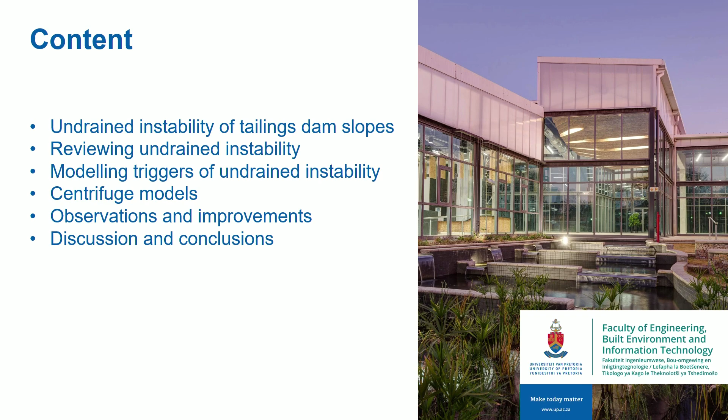Thank you very much for the introduction, Suzanne and Jan, and thank you very much to the organizers for the invitation. I slightly modified the title of my presentation to modeling of the triggers of undrained instability in tailings dams. What I'm going to present is aspects related to undrained instability of tailing slopes.

I will review undrained instability, specifically looking at modeling triggers of undrained instability. Then I'll describe the centrifuge models with some observations and discussion conclusions.

What I'm showing here is a Google Earth image of the Johannesburg area. There's a very small red dot on the locality map at the bottom showing the location. All the white marks you see in the figure represent tailings dams. Over this area of approximately 70 kilometers, we've got a vast number of tailings dams.

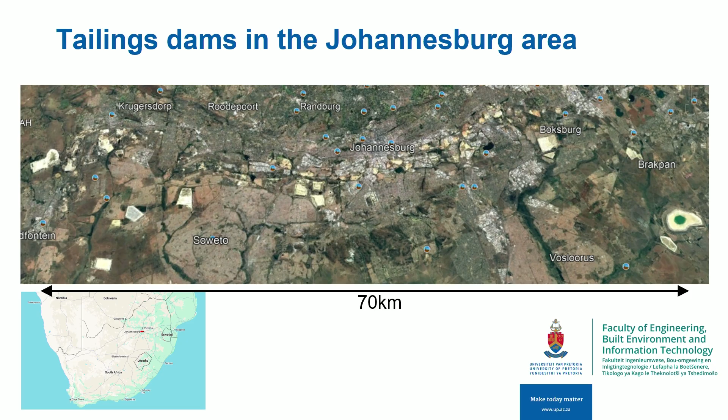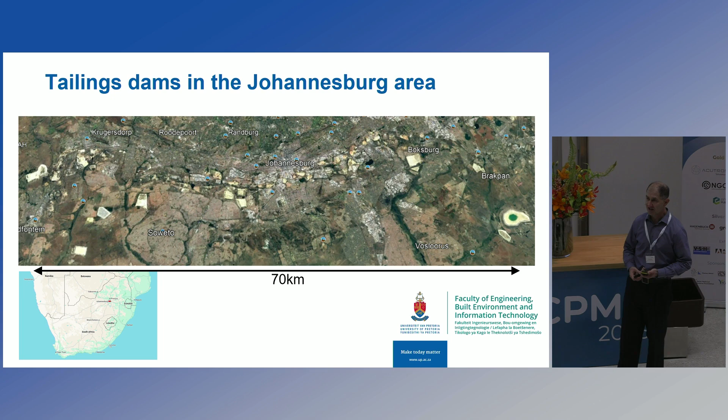Many of these tailings dams are very close to built-up areas, and they have been around for many years. They started mining in 1886. So we've got a large number of tailings dams very close to a lot of built-up areas, and all these tailings dams currently stand—they are at the moment behaving.

What I want to do is zoom in. This is a photo I took from the plane coming back from the previous physical modeling conference in Korea. Coming into land at Johannesburg Airport, you often see this very large tailings dam. It measures 4.1 kilometers in length, is 130 meters high at the moment, and is an upstream raised tailings dam.

What is important to note here is that we have a pool on the dam that is relatively small. It is well contained in the middle of the dam, and we have relatively flat slopes. I must also mention we have a relatively dry climate in South Africa.

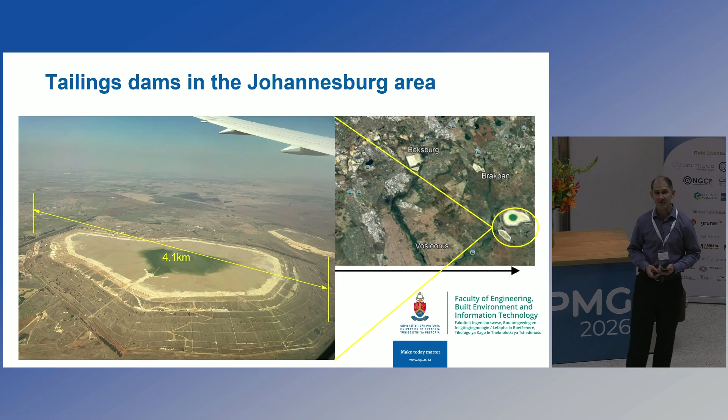Nearly all the dams that I showed you in the previous picture are upstream raised, and obviously to change things on those dams to stabilize them is prohibitively costly. So we have to make these things work.

A typical upstream tailings dam looks like that. We've got the starter wall, then people start to construct a drain—these days they will always construct a drain. Usually there's a layer, a liner system underneath today.

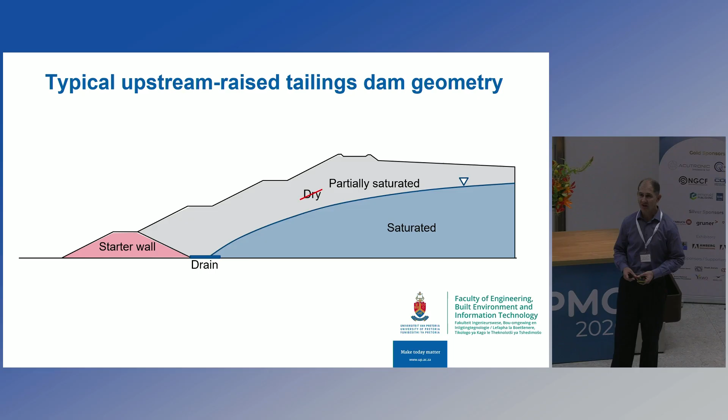They then start filling up the dam, allowing it to dry properly. Then you use the dried material to raise the embankment, and there will be a pond far to the right. You will have a zone that is saturated below that—people thought initially dry above that, but it's partially saturated, so you still have unsaturated soil mechanics to consider there.

So these dams are then raised by building them higher with the material that they are made from, which is a slurry when it arrives. And obviously, you need to do this very responsibly to not have big instability issues.

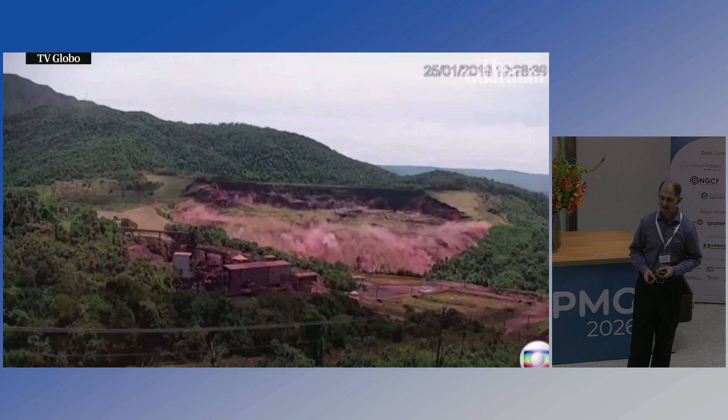I'm sure all of you would have seen this very disconcerting video of what happens if things go wrong. This happened in 2019 in Brazil, so we are reminded of the consequences of getting it wrong. If we do not manage these processes, you can get this very disastrous accident happening, and it cost the life of 270 people. So we need to deal with this very cautiously and carefully.

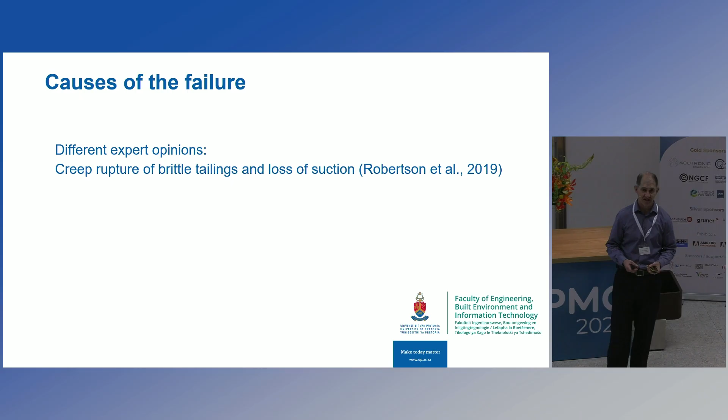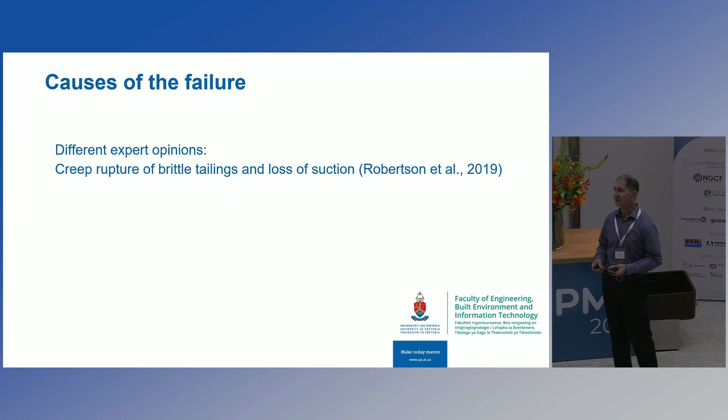The causes of the failure that I've shown you are ascribed to different reasons by different people. One group proposed creep rupture of brittle tailings, with creep eventually breaking the bonds in the weakly cemented soils, combined with a reduction in suction over time due to rainfall aspects, resulting in this failure.

What you probably did not see on the photo is they were busy installing piezometers using drilling involving water in the process down to 60 meters. If that column was full of water, that would exert a pressure of 600 kPa in the layers at the bottom where that piezometer was being installed. So 600 kPa in a dam with concerning stability may be a very real trigger, and the group in Barcelona is proposing this as a possible cause of the failure.

The bottom line is that we observed a very dramatic liquefaction type failure, and that is why we are questioning undrained instability. We need to understand undrained instability.

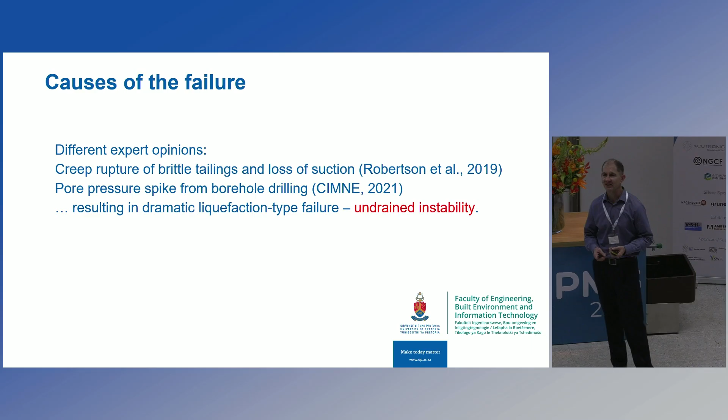Traditionally, tailings dams have been designed using drained analysis. This has a very large impact on the mining industry because we are now concerned about undrained instability of tailings dams. Tailings dam stability analysis, when analyzed undrained, shows that numerous dams are potentially unstable. The cost of remediating these structures is absolutely extreme. The most expensive buttress built in South Africa that I am aware of cost $80 million. $80 million cannot be afforded by every mining house. So the implications are really severe.

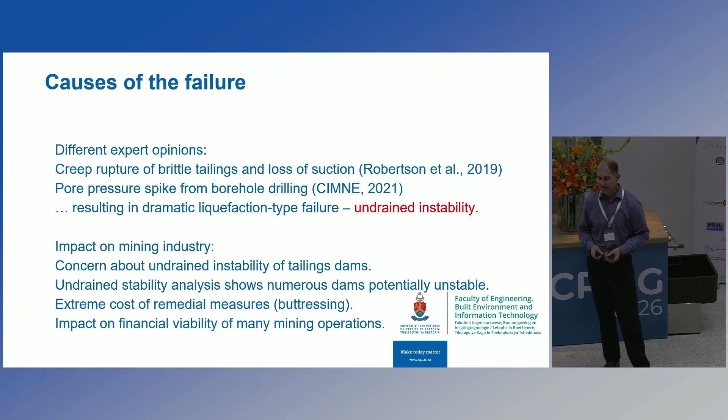So the financial feasibility or viability of our mining houses are in question, and they employ very many people who will have no other income, basically. So we have to balance this impact: do we close down the mines because of the financial constraints, or what are we going to do? We can't risk the risk to life that we have seen could be real.

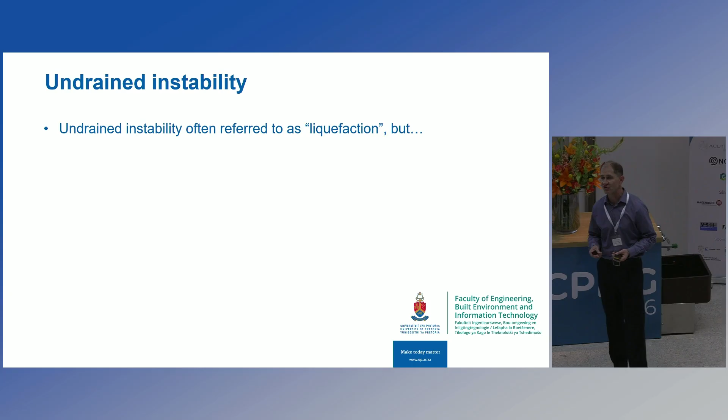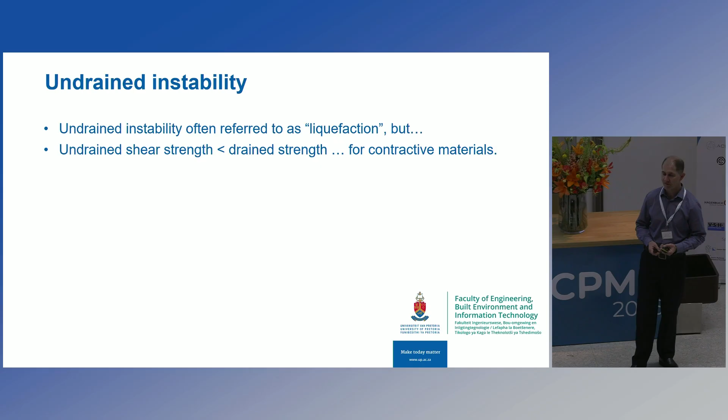So we are really interested in understanding liquefaction, trying to model that in the centrifuge. But one thing we must realize is you do not need liquefaction for a slope to become unstable under undrained conditions. We just need a reduction in the mobilizable strength, which could really happen. Typically, undrained strength is less than drained strength for the contractive materials we are often dealing with. And for you to see liquefaction, we need a contractive and a strain softening material. Importantly, undrained behavior requires some sort of a trigger.

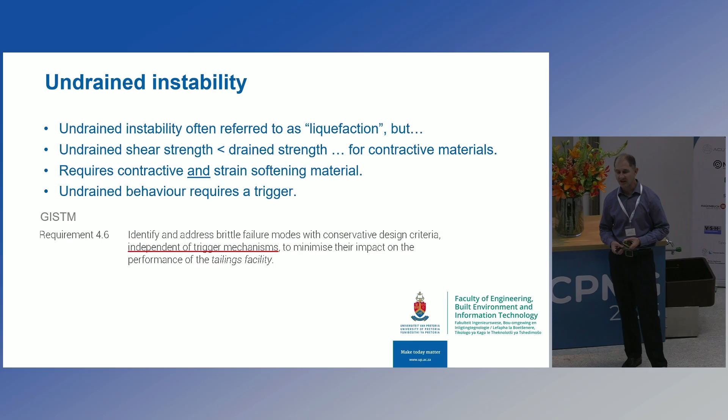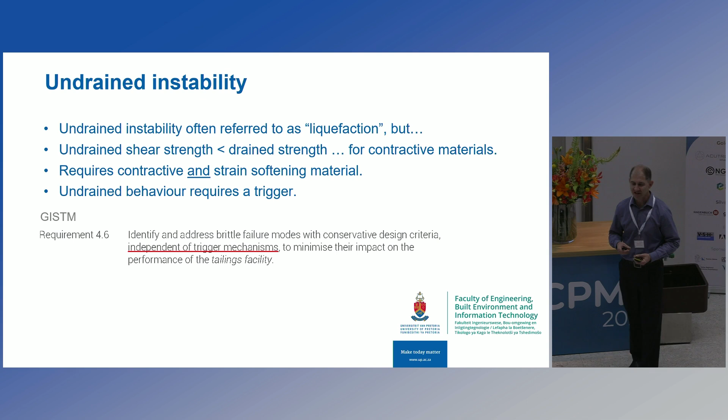Now, after the disaster that I showed you, the Global Industry Standard on Tailings Management was published, and they advocate for the identification and addressing of brittle failure modes with conservative design criteria independent of the trigger mechanism. So they don't really care about what the trigger mechanism is. They say you will design for undrained conditions. We as academics find that somewhat unsatisfactory because we want to understand the mechanisms that can result in this undrained stability or instability.

So I want to spend a little bit of time talking about undrained instability, factors controlling that. I'm showing a drained stress path, the black line, and an undrained triaxial stress path. The undrained triaxial stress path turns to the left and reaches a peak, so it's a slightly strain softening material. If you do many of these tests, you can map those peaks and fit a line through it.

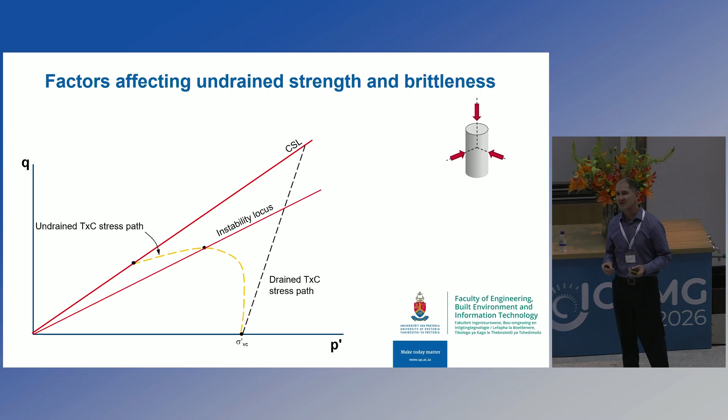The reason why we are able to follow the stress path to the peak and beyond is because we are doing a displacement control test. Life is not displacement control, it is load control in a real tailings dam. So when you get to the undrained instability locus, you will see potentially brittle failure taking place, because strength is going to reduce with further strain being imposed.

So there's this undrained, unstable zone. And a big question now is how close is our stress state in the dam to that unstable zone? So now we need to think about the ratio between horizontal and vertical stress.

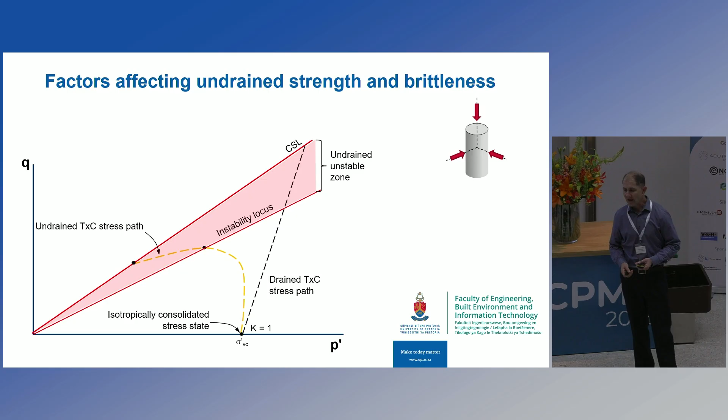If we have isotropic conditions, then the stress state is far from the instability zone. It is basically on the floor where I'm showing it at the moment. And if you look at the shear stress strain relationship, the stress state is represented by the K equal to 1 value. So there's a lot of scope to handle shear strain, and to get you to the peak, you need to travel quite far.

So if K naught is not equal to 1, if it is lesser than 1, which we believe it typically to be, because you are mobilizing shear stress in the walls of your tailings dams, then it brings you a lot closer to the apex of that stress strain curve. So the material is going to behave much more brittle than in the case if you have a K naught equal to sort of hydrostatic conditions. So K naught is an important factor - the ratio between horizontal and vertical stress.

So another aspect that is important is what is the shape or the direction of the stress path that we are imposing. I'm showing a triaxial extension stress path, which is bringing us to the instability locus much more directly than what a drained triaxial stress or a compression stress path would have done.

There are other very important stress paths that we need to consider, like the constant shear drained stress path, which is going to be traveling from the right to the left in the diagram as water table rises, for example. A rising water table will cause the stress state to travel from right to left across the screen. And that is a real, an actual possibility in tailing slopes.

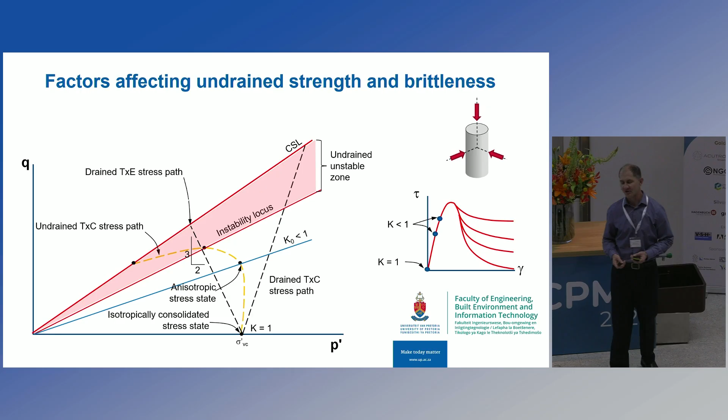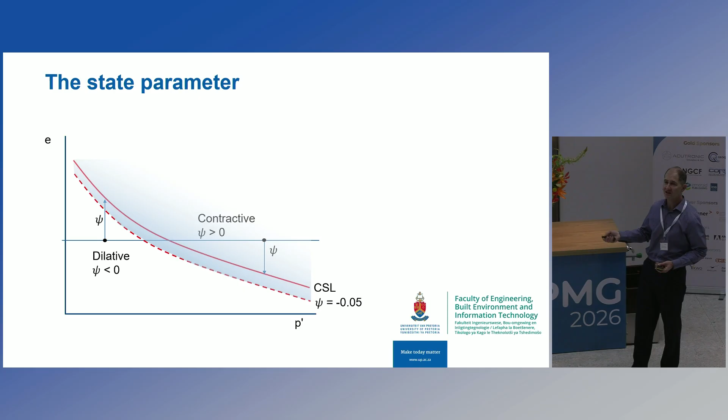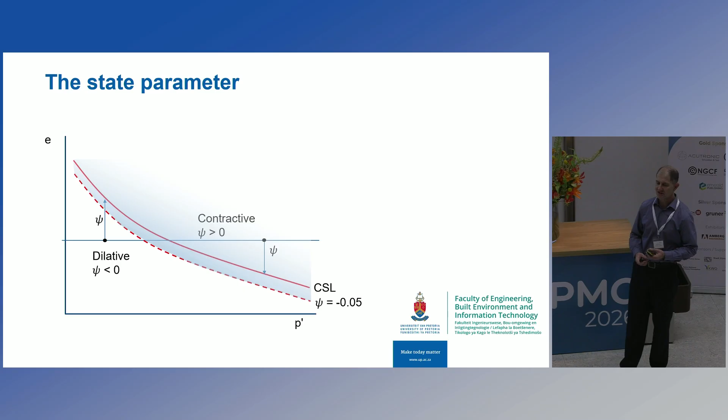So if you have a contractive material in your tailing slope, you will be concerned, and you will be glad if you have a dilative slope. So the division between contractive and dilative is not really taken at the critical state line, but from experience, I think it's Been and Jefferies 2016 proposed using minus 0.05 as the cutoff.

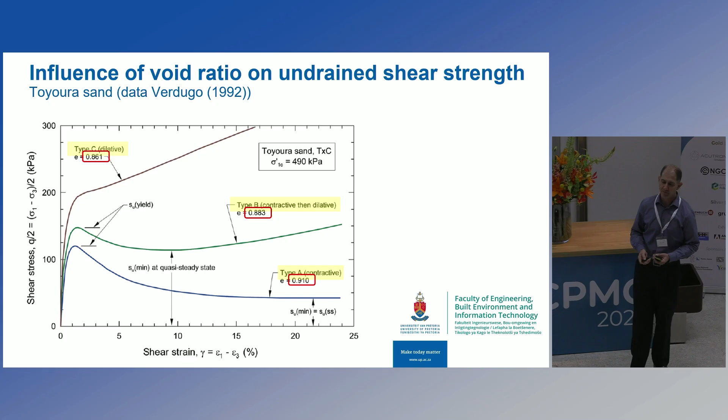So more conservative. What else influences undrained shear strength? So this is well-known data by Verdugo. What I want to point out is we have the same material, Toyoura sand, and we are looking at a void ratio of 0.86. If you change that void ratio to 0.88, you completely change the stress strain properties. Taking it 0.03 higher than that, you changed it completely.

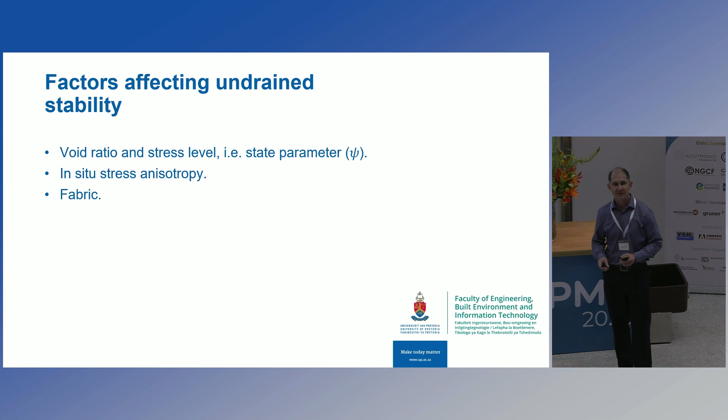So if you want to do an analysis of a tailings dam stability and you have much variation in shear strength, in void ratio, it is difficult for you to analyze the undrained shear strength. So factors affecting the undrained shear strength include the state parameter, which is capturing the void ratio and the stress level. It is important to understand stress anisotropy, that comes into the problem. The fabric is important because it controls that instability locus that I've shown, which is not a material property. It depends on how the material is placed and other factors. So it also depends on the imposed stress path.

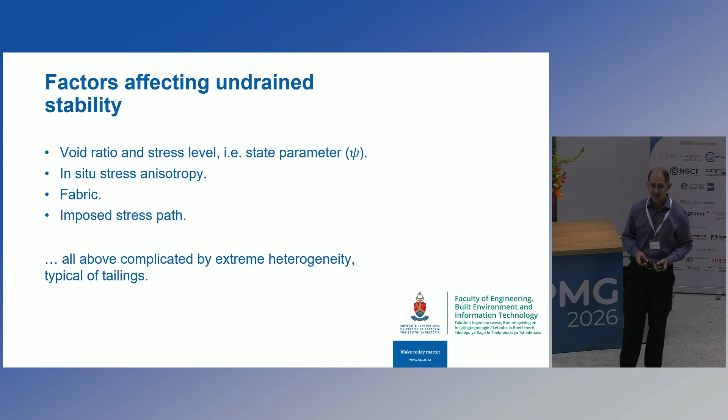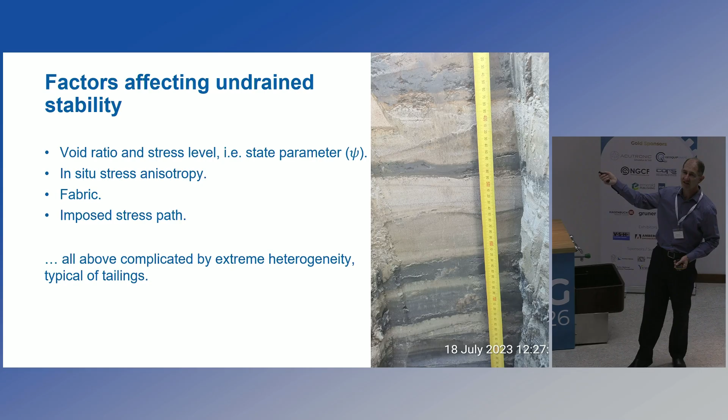So there's a complicated problem to analyze, and then the material that you're handling looks like that. So extreme heterogeneity, we have, you can see the scale there, that's 100 millimeters. You have several layers in there. So we have a problem on hand.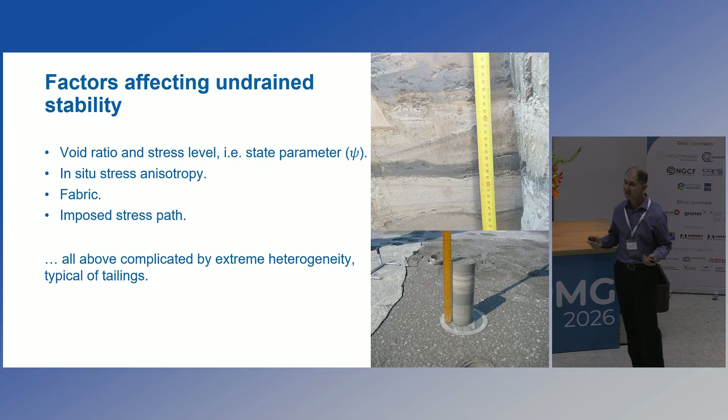So we're sitting with a very difficult problem. We find some guidance in the literature about what could constitute mechanisms of instability, so proposed triggers of undrained instability: overtopping, overloading, loss of support. What I want to say at this stage is we excluded earthquakes, seismic or dynamic triggers from the work we've done. We don't have an earthquake shaker, and South Africa is a low earthquake zone, not meaning we don't get any seismic action, but we did not include that in our study.

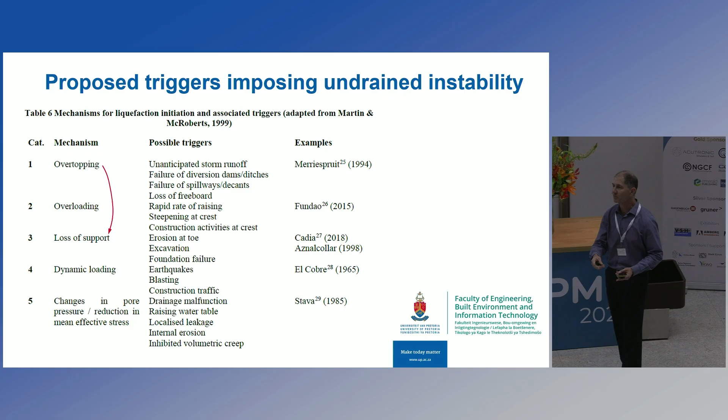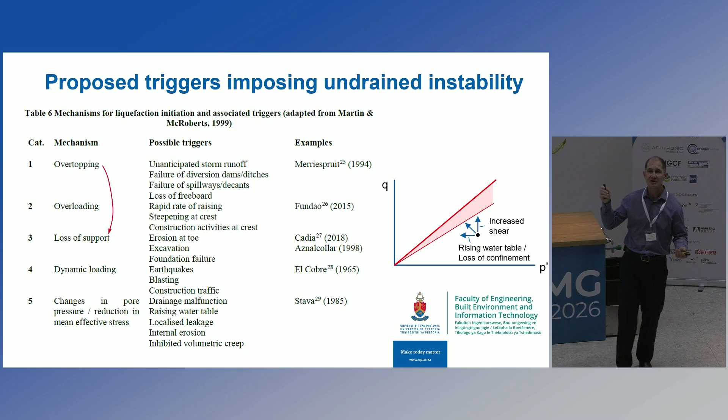The overtopping and loss of support triggers are two faces of the same coin, because overtopping typically results in removal of material from the toe of a slope due to erosion, and you end up with a loss of support. All the stress paths associated with different trigger mechanisms look like what I'm showing: the constant shear drained stress path points there, and if you increase shear stress, maybe due to placing load somewhere, it looks like that. But all of them drive us closer to the instability zone.

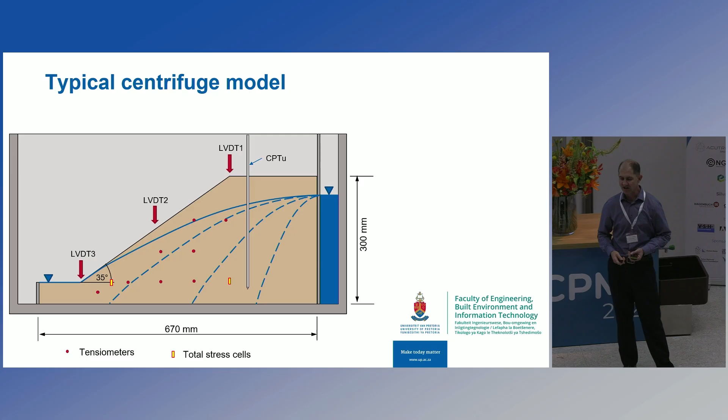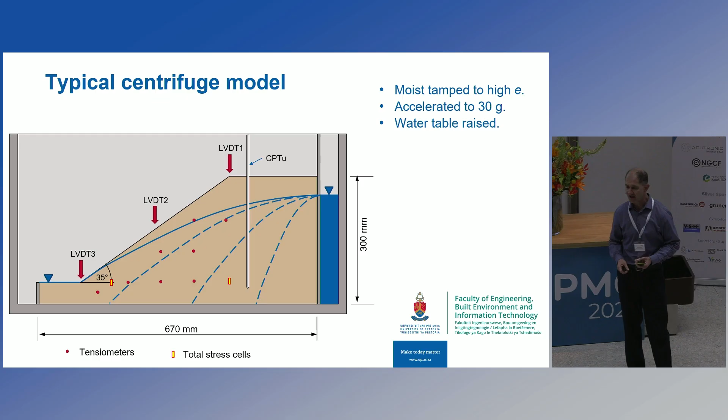There are a few model studies in the literature studying tailings dams, but many on slopes. We read up on some of these and started building slopes in the centrifuge that looked a bit like that. We moist-tamped the slopes to have a high void ratio, contractive fabric, and accelerated them to 30G, that's our scale. We then raised the water table on the right-hand side and allowed it to develop. Once developed sufficiently, we probed with the mini CPT so we can compare between tests and show consistency.

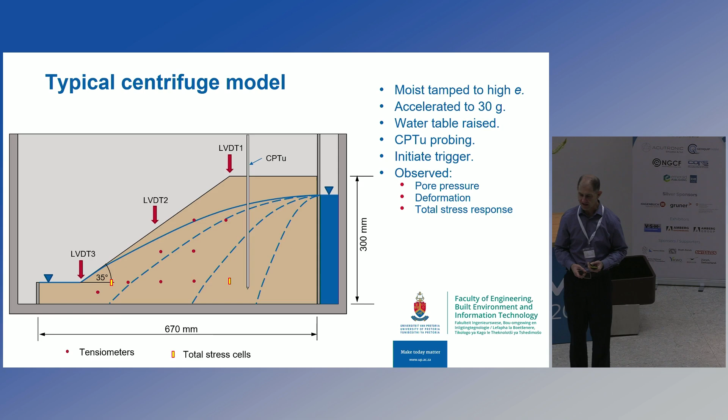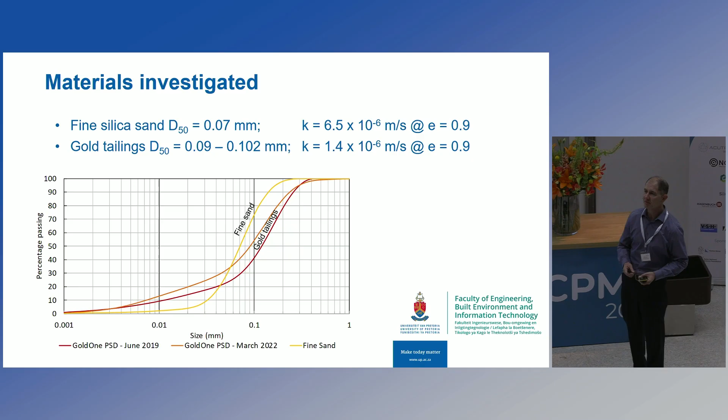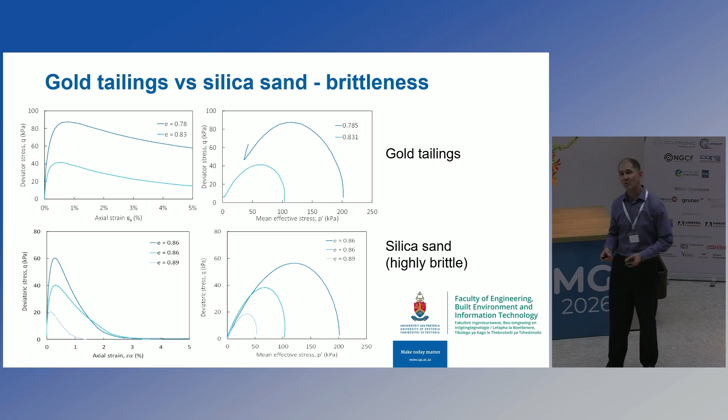We then initiated the trigger and monitored pore pressures, deformation, and in a few tests placed total stress sensors. The soils tested were a fine sand and a gold tailings. We wanted to test with gold tailings because we thought that would act most undrained, being finer and therefore giving the most dramatic failure. But it turned out you don't actually get the most dramatic failure with the tailings, despite achieving undrained conditions more readily with the fine-grained material. The sand, if tested in a triaxial, is much more brittle. If you look at the curves at the bottom, the sand is a more brittle material than the gold tailings, so we saw better responses in the slopes using silica sand.

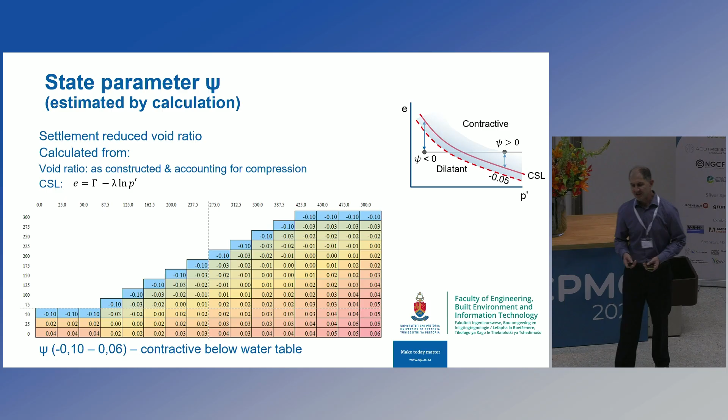So still contractive nonetheless, considering the pore fluid. For liquefaction, if you want to scale the event, there are two processes: the collapsible void space that needs to collapse, and the dissipation of subsequent pore pressure, scaling with different quantities. If you want to unify that, you can use a viscous pore fluid. We used viscous pore fluids, a water-glycerin mix. We had problems using methyl cellulose as it clogged up our models, for reasons I'm not going into now. So that's the fluid we used.

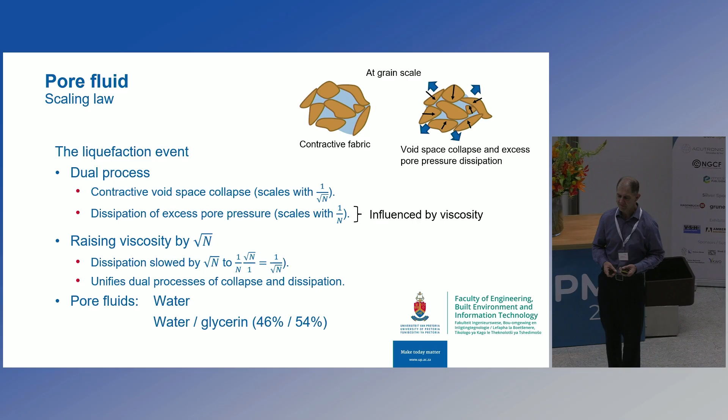I'm going to show only two triggers: a rising water table and a rapid buttress construction. But we also investigated loss of confinement at the toe, rapid surcharge placement at the crest, and drilling, a trigger proposed by the group from Barcelona, drilling with water and injecting pressure at the bottom of the slope.

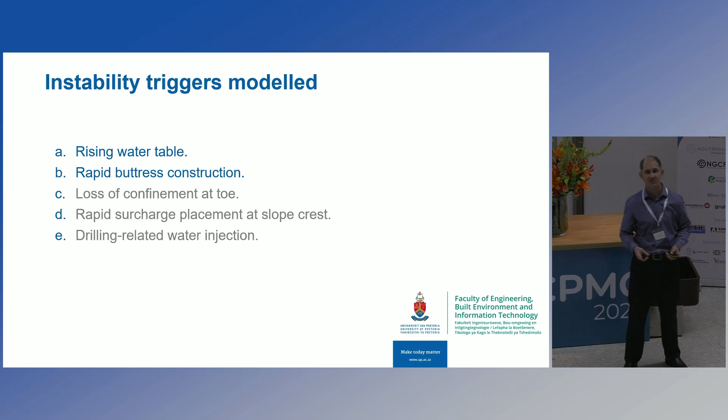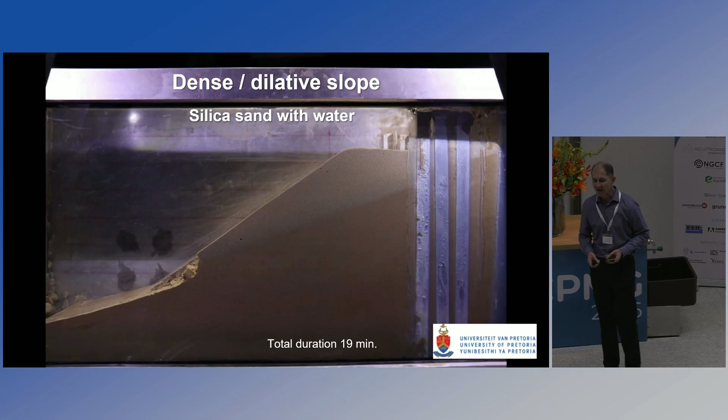Rising water table, we're looking at the dilatant material, dilative material. Water table rising from the right-hand side, you can see this progressive sloughing taking place, but never a catastrophic failure. This is what we want, a dilative tailing slope, ideally.

So I want to just advance that. Then I'm going to show you a contractive slope. Let's just get this to play. Okay, that's happening. So this is now at the verge of failure.

So a fairly dramatic failure that took roughly half a second to develop without any warning prior to the failure taking place. And it only took place when the water table intersected the toe of the tailing slope.

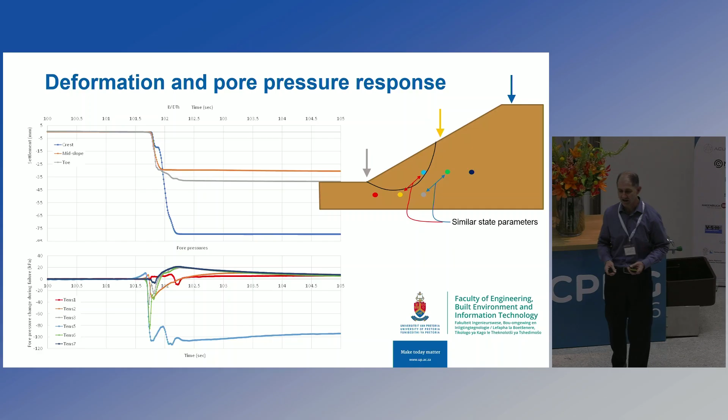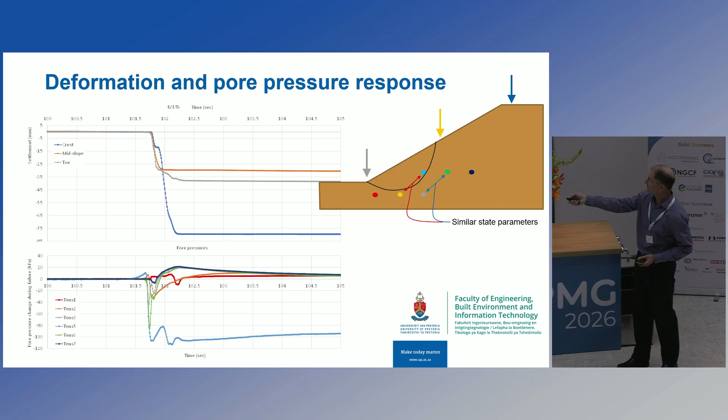So this is some data from the observations. We've got settlement at the top, 2, 3 LVDTs, and then pore pressure measurement. I want to point out that slight rise in pore pressure before the actual failure. I'm going to zoom in a little bit.

So we've got our LVDT readings. Settlement started to accelerate a little bit. As the settlement started to accelerate, we saw a little bit of a rise in pore pressure, about a meter of water pressure, 10 kPa. And then the failure initiated, immediately followed by a very dramatic drop in the pore pressure. Then basically the failure was over and collapse occurred.

So why this drop in pore pressure? It is not because of shearing of an apparently dilated soil, but because of the removal of material from the slope under partially drained conditions. So you remove a lot of material, dropping the total stress and the pore pressure. We later confirmed that by fairly rudimentary total stress measurement.

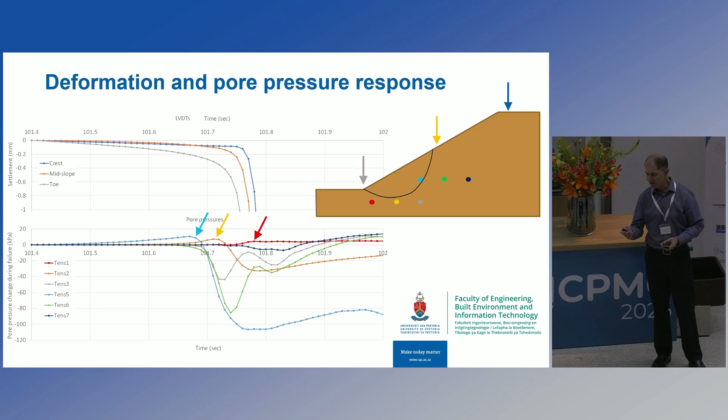So interesting also, you can tie the development of the various failure surfaces to the timing of the response of the small pore pressure measurements. This happened when the drained factor of safety was equal to 1, so 0.97, very close to 1. That was for the first slip failure, a very rudimentary drained analysis.

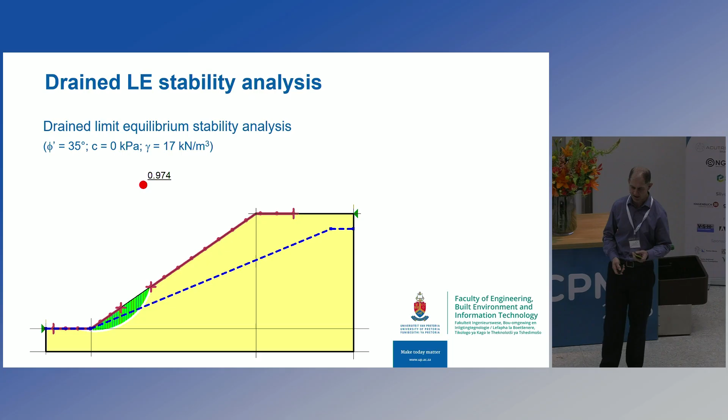So what we found is whether a slope with that trigger failed or not was very sensitive to the position of the water table. The students got extremely depressed when we tried to trigger instability, because half the time nothing happened, which is of course also an important lesson to learn.

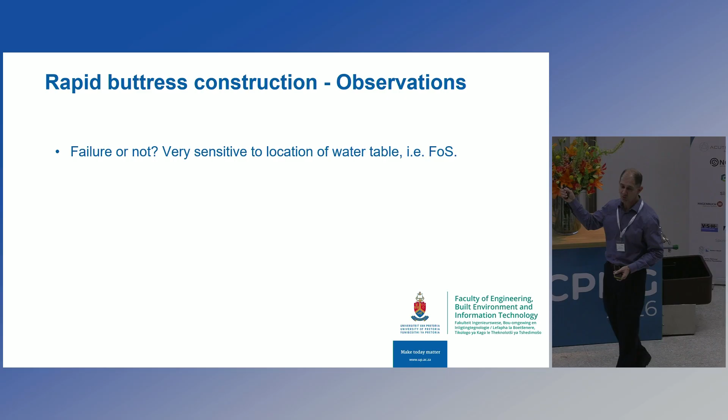So the failure could only be initiated when the drained factor of safety was very, very close to 1 in the cases that we have studied. So that is what I've said: undrained behavior in the observations that we see was a consequence and not the cause of instability.

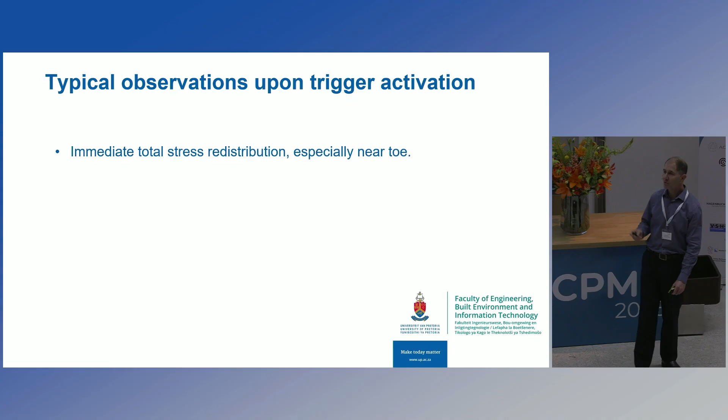But we need to question - let me just go through the typical observation upon triggering. So we saw an immediate total stress redistribution, from what I called rudimentary total stress measurement. We saw small positive pore pressures near the toe and in shear zones. And we saw that shearing of contractive soils only produced a pore pressure response in shear zones, not widespread throughout the saturated zones.

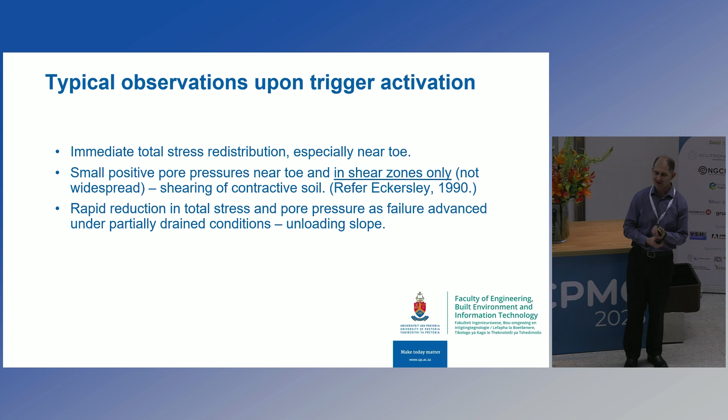The rapid reduction in total stress and pore pressure advanced under partially drained conditions, basically unloading the slope, which explained that drop in pore pressure.

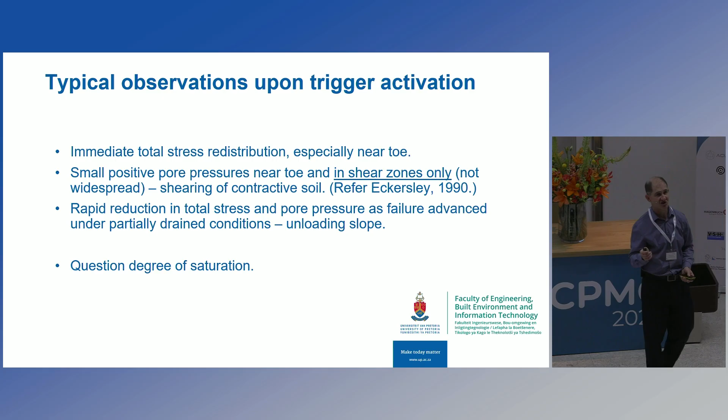An important point we need to address, however, is to question the quality of the saturation in our models. How certain are we that we had properly saturated models? So we thought of all sorts of plans to improve the degree of saturation.

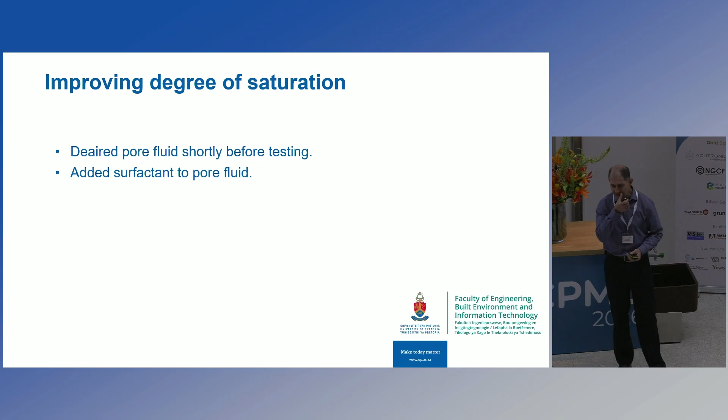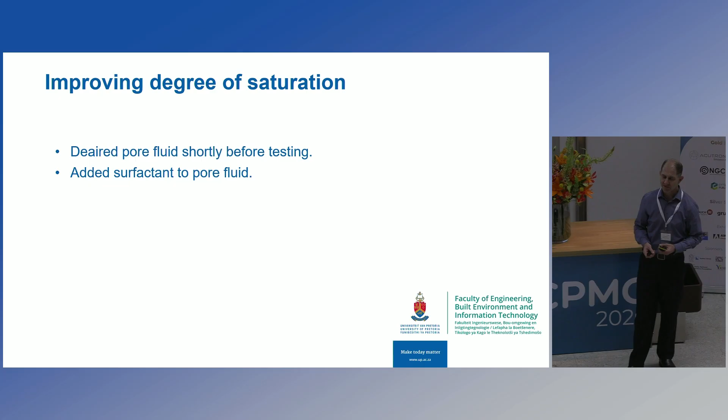So we de-aired the pore fluid immediately, shortly before the test, because if you leave the fluid for any significant amount of time, you quickly get air dissolving into it again. We then added a surfactant, basically the South African equivalent of fairy dishwashing liquid, appropriately called sunlight liquid, as a surfactant to the pore fluid. And then we also conducted the test under a CO2 atmosphere.

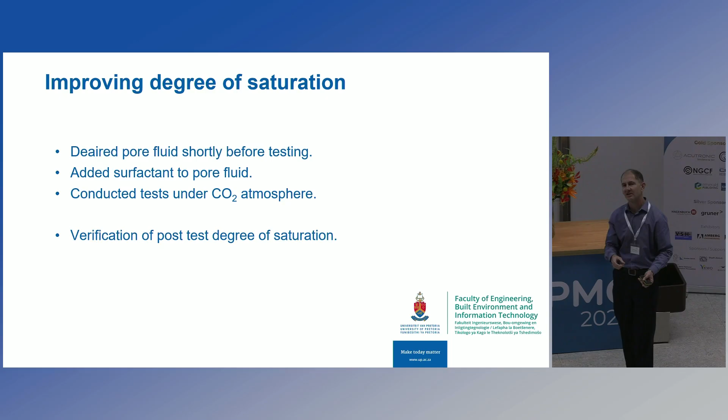So we then verified the degree of saturation after testing by making thin-walled brass cylinders that we pushed into the soil, then slid a plate underneath and this plate over the top, trying to accurately capture that volume, and then went to measure the degree of saturation actually achieved.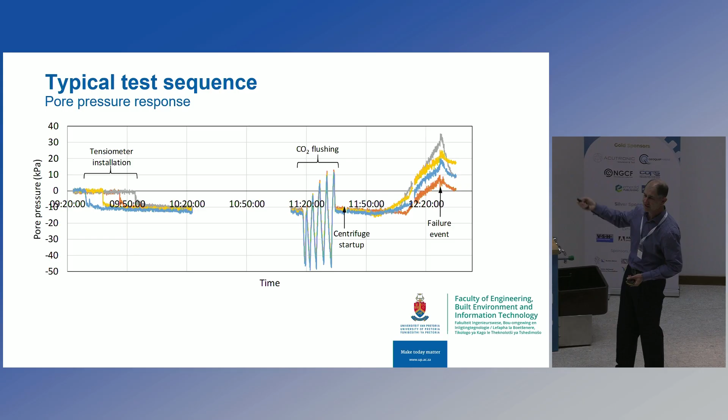And then just before the test, while the model is already on the centrifuge, we applied a small partial vacuum and then filled the box with CO2. We repeated it 5 times to try and flush out all the air that we could. During the test, we kept introducing CO2 and displacing any air, hopefully keeping any air out of the model. Then the test started, pore pressures rose as the water table established, and then the failure event eventually took place. This is the result on a tailings slope, so gold tailings slope.

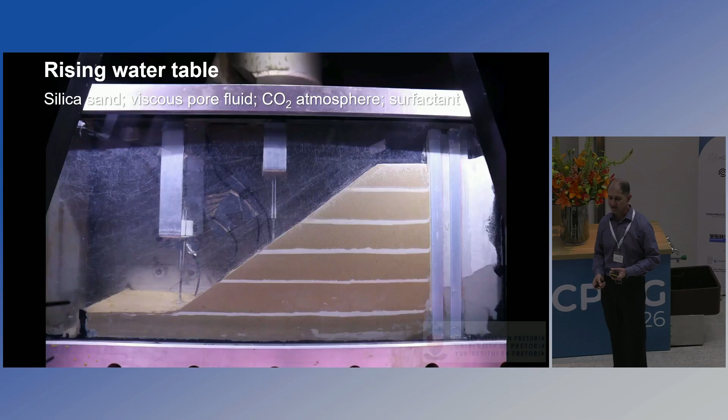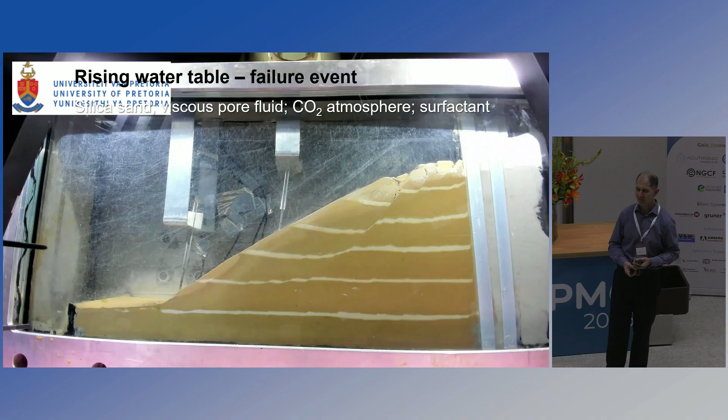We got the water table establishing, also test duration about 2 hours in total. The failure was more dramatic than previously. I'm just going to show you the failure event itself. That is sped up a bit. It happened over 3 seconds or something like that.

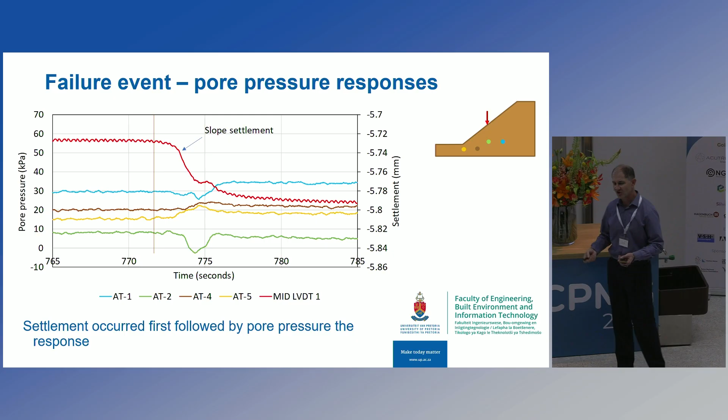So we did not see a very dramatic failure, but I'll get to that in a minute. Let's just show you limited data. Got some settlement taking place. The position of that red line is more or less where you can first see the settlement initiating and the pore pressure response subsequent to that. So the pore pressures did not initiate the failure. They were a consequence of the shearing.

So then some results from our sampling where we took the cylinders, pushing it into the ground, trying to recover them very carefully and then going to weigh them, getting rid of the glycerin because glycerin does not evaporate. So there's a long story behind that.

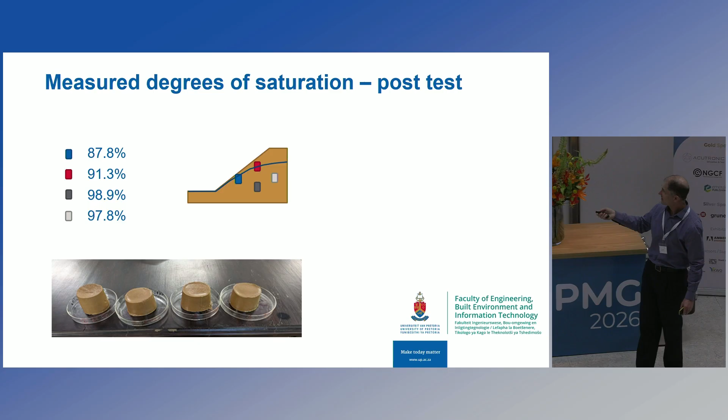But the degrees of saturation, despite what we have tried, are not amazing. You see at the water table and above the water table, fairly low degrees of saturation. Below the water table, a little bit better. But what you must also remember, as soon as you stop the centrifuge, capillary rise starts to dewater your model as the dry zones begin to suck up moisture from underneath. So it is very difficult to verify degree of saturation properly and to achieve degree of saturation.

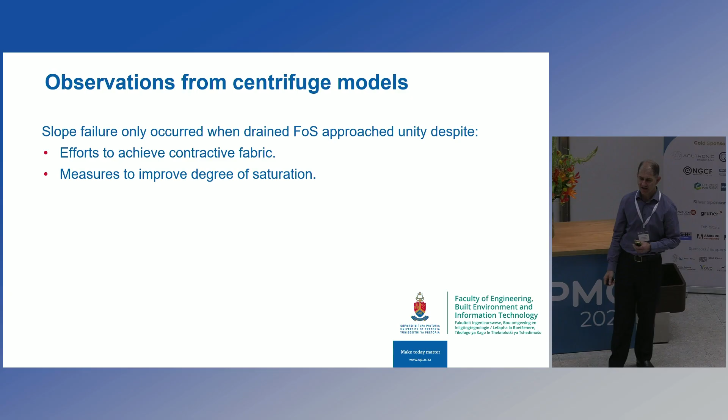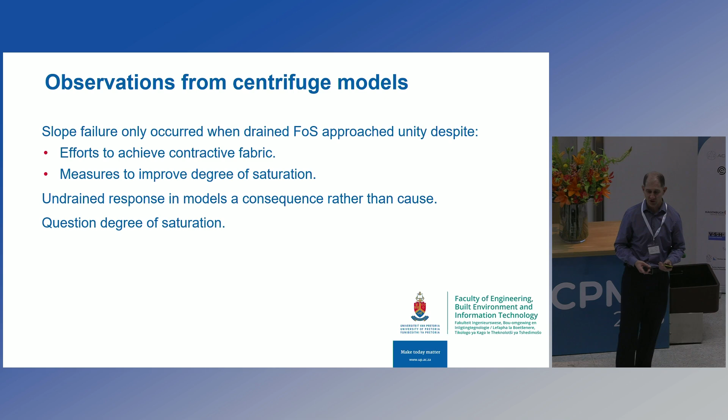So sadly, we saw no noticeable difference from previous tests. The observations from our centrifuge models is that slope failure only occurred when the factor of safety approached unity, despite our efforts to create a contractive fabric and to improve degree of saturation. So the undrained response in our models were consequences rather than causes of instability. We questioned the degree of saturation and went to the efforts mentioned to try to increase the degree of saturation.

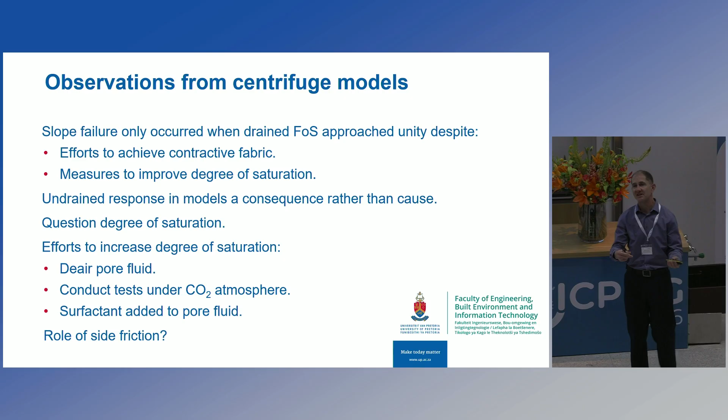An important question, maybe from listening to Mark yesterday, is the effect of side friction. Do we really get the transfer of stress of self-weight to the soil to the degree that we need it? So sidewall friction is maybe an important aspect to consider.

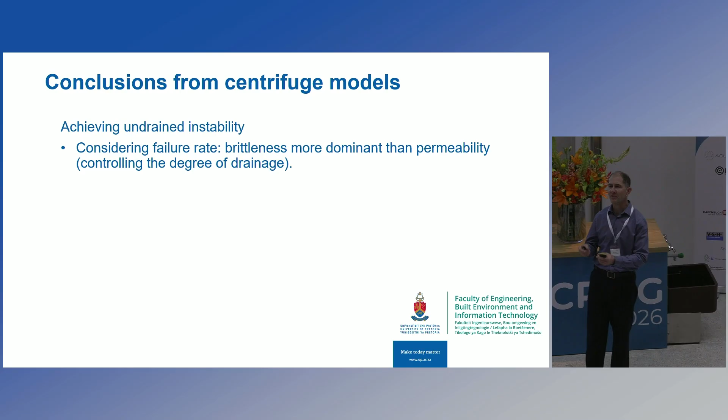So the conclusions regarding achieving undrained instability in a centrifuge model: should we have a more impervious or a more brittle material? A more impervious material will give you a better chance of achieving undrained conditions. But it seems that the brittleness of the material is actually more dominant in achieving proper brittle behavior or more dramatic failure. So the sand failed more brittle than the tailings despite its higher permeability.

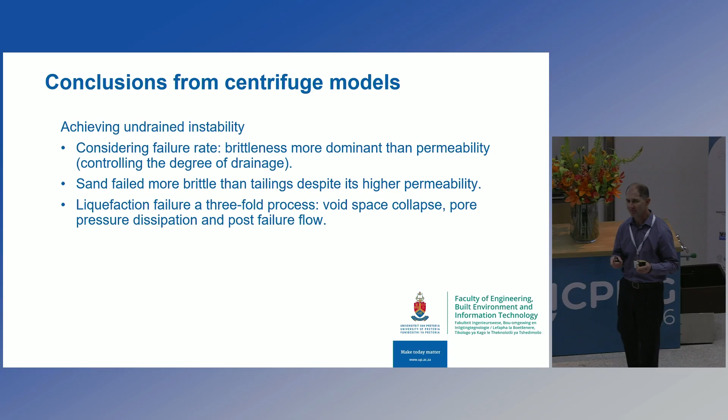So the liquefaction process is a threefold process: the void space collapse, the subsequent dissipation of excess pore pressure, and subsequent to that, the post-failure outflow that takes place. And what we found is you can unify the first two using a viscous pore fluid, but that slowed down the post-failure flow. So we got more dramatic failures using water.

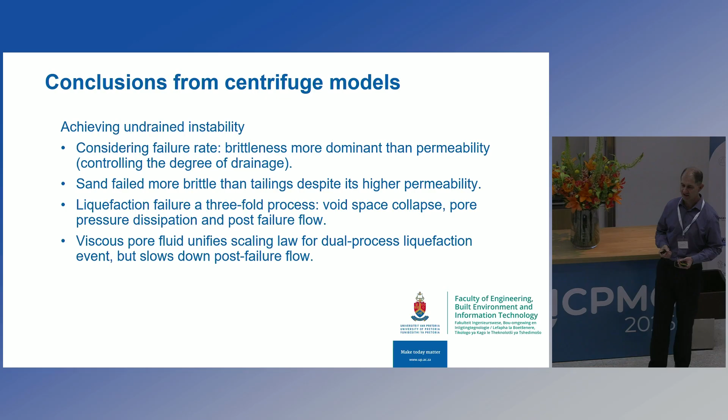We still need to repeat the test I've mentioned now with CO2 instead of water. We have not done that yet. The last test that I showed you was done literally 12 days ago. So the most rapid failure, as I said, was achieved using water.

So we are yet to achieve undrained instability while the drained factor of safety is greater than 1. We have not been able to achieve that. The fact that we couldn't achieve it does not mean that it can't be done. Hopefully we will still be able to demonstrate undrained instability and use the centrifuge as a tool to investigate this problem. So we can question whether a centrifuge is suitable for modeling undrained instability, but we haven't given up yet.